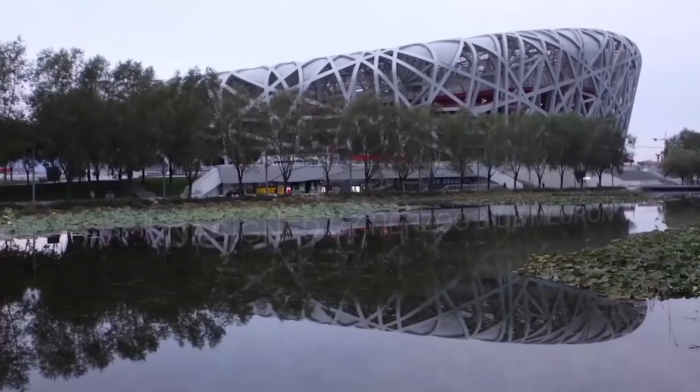The wind is very important for a building. First, let's look at how the wind is formed.

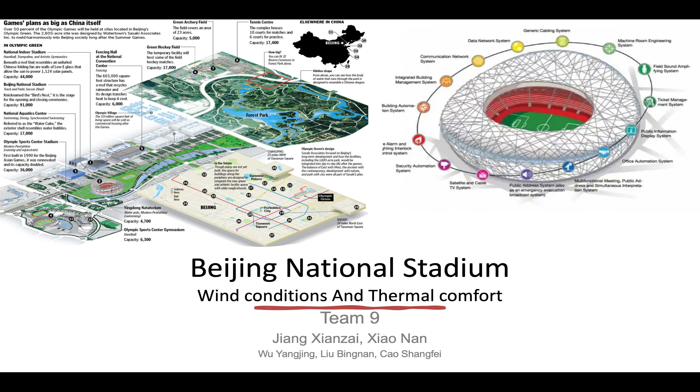Wind that travels around angular surfaces or steep slopes becomes gustier and more turbulent. The wind can also stay turbulent long after passing a significant obstacle. This can be called the turbulent zone or wind shadow.

For some obstacles, the wind can become turbulent well before reaching it. One generic estimate is that the turbulent zone is 7 times the height of the obstacle on the downwind side and 3 times the height of the obstacle on the upwind side.

Therefore, taller obstacles create larger turbulent zones. The reality is far more complicated and depends on a number of factors.

The shape of the object is very important. Gentle slopes with a smooth surface can create negligible turbulence. An angular shape or steep slope, however, creates a far larger turbulent zone.

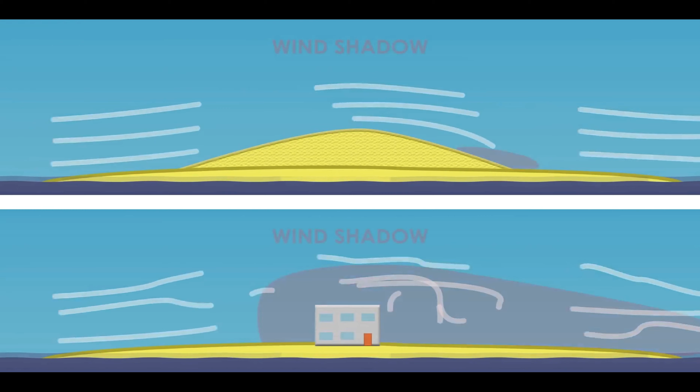The total number of wind obstacles is also critical. The turbulence from a lone object can disappear quickly, since it has clean wind on all sides, which helps to remove turbulence.

However, with numerous obstacles, the turbulence will last far longer, as the wind deflections can combine together.

Another key factor is the wind speed itself. When wind speeds are higher, the gusts are stronger and carry further.

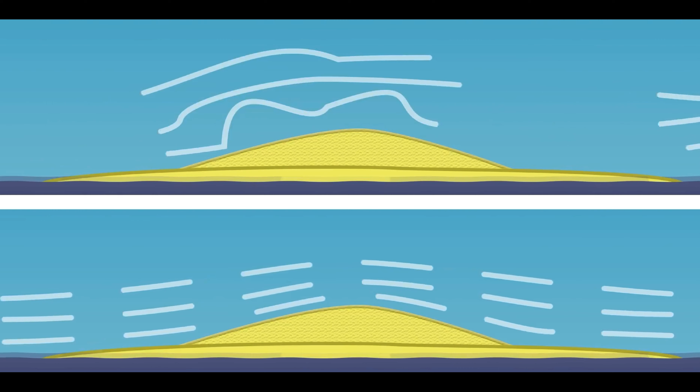Ultimately, your best bet is wind that approaches over open ocean. The wind's approach is then clear of obstacles.

To be sure, you should walk to the launch area and feel the wind. You should be able to feel if the wind is changing.

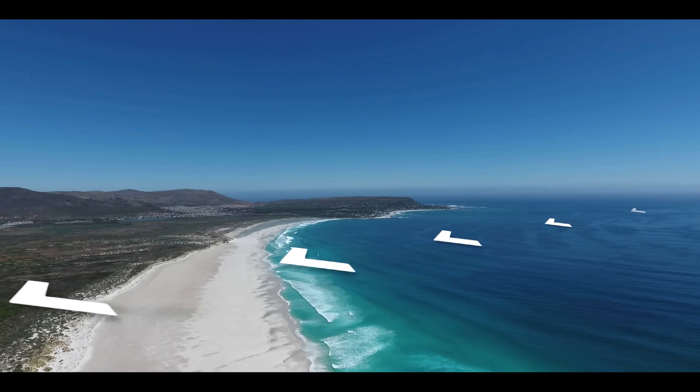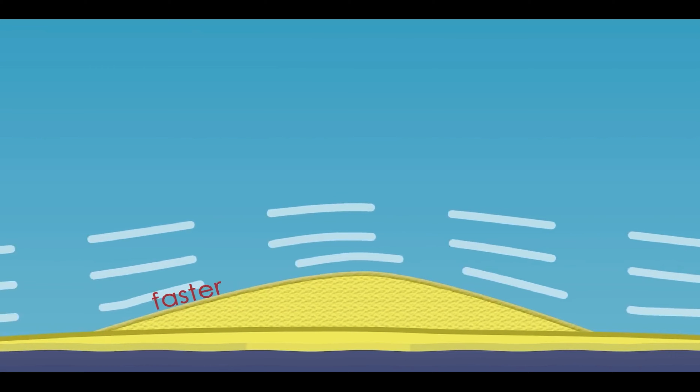Obstacles can also alter local wind speeds. When wind is forced into a narrower space, the airflow is forced to speed up, and wind moving into a wider space will slow down.

Wind passing between two mountains, for example, will speed up. Or wind climbing a slope will be forced to speed up.

This is why it might sometimes seem windy enough when you arrive at the top of a beach or sand dune, but when you walk to the water's edge, the wind's not so strong.

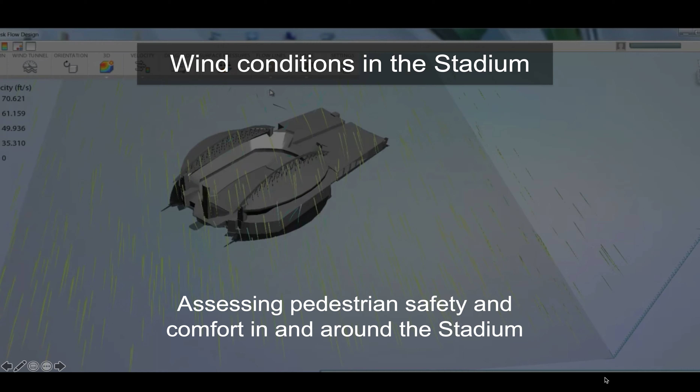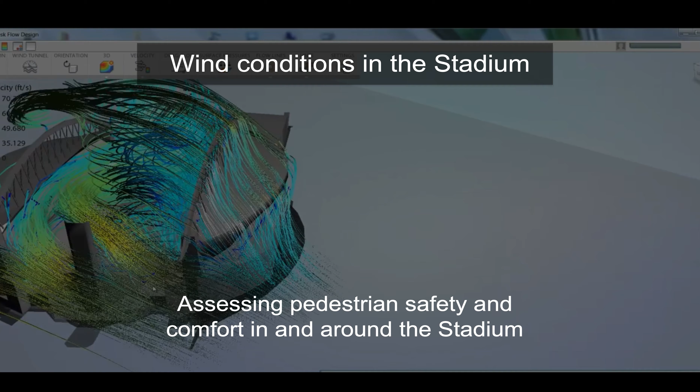So it's necessary to combine boundary layer wind tunnel and numerical modeling studies to assess spectators' comfort levels for the stadium, with wind tunnel measurements being made for the external plaza surrounding it, and for the concourses and the key seating areas within.

These wind speeds were used in assessing pedestrian safety and comfort in and around the stadium. Wind conditions in the stadium and the external plaza are generally suitable for strolling or for short periods of standing or sitting. No areas would be uncomfortable for strolling.

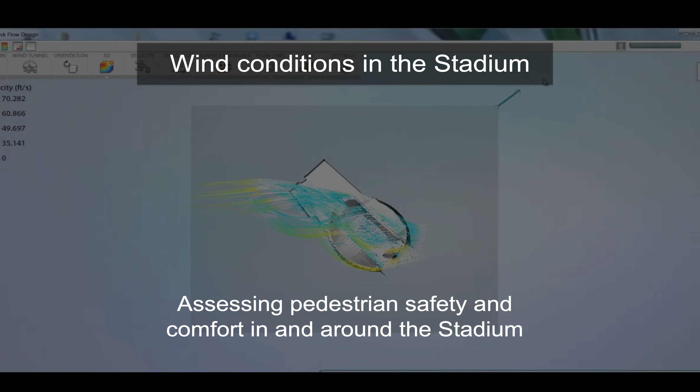The wind speed at the game is also very important. IAAF provides for all track and field records of 200 meters and below: if the average wind speed of the athlete is over 2 meters per second in the direction of travel, the record will not be accepted.

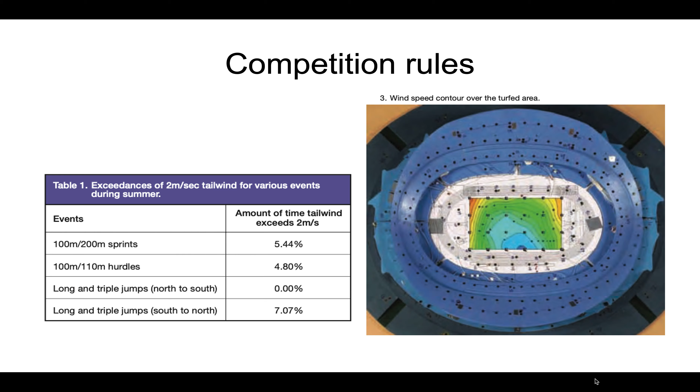Next, let's take a look at thermal comfort. Designing for thermal comfort, there is no one-size-fits-all recipe. Solutions vary depending on the local climate, as well as the type of activity performed by the building users.

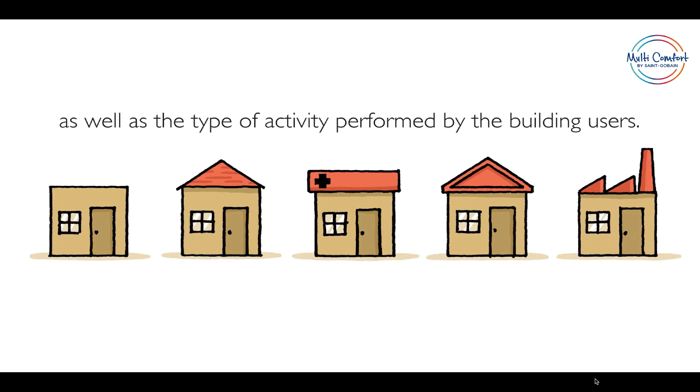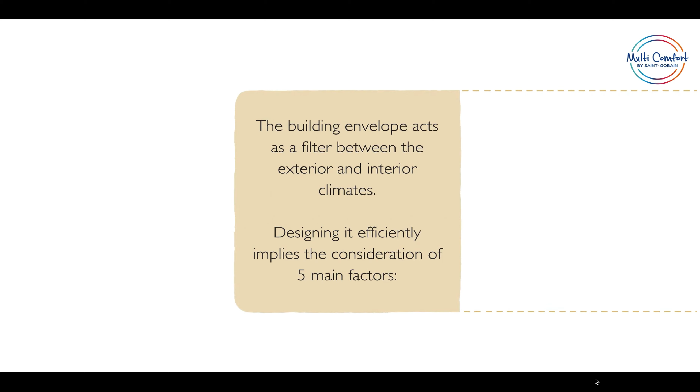The building envelope acts as a filter between the exterior and interior climates. Designing it efficiently implies the consideration of 5 main factors.

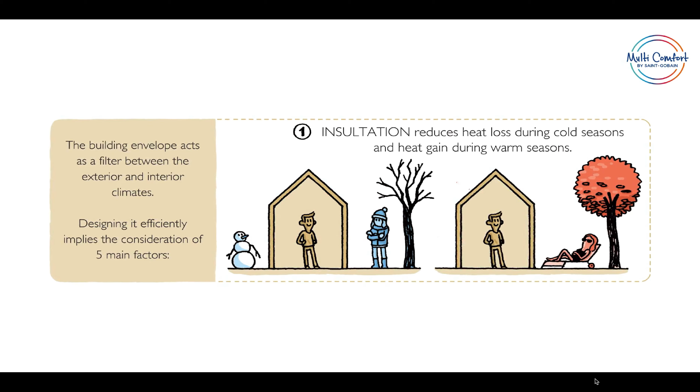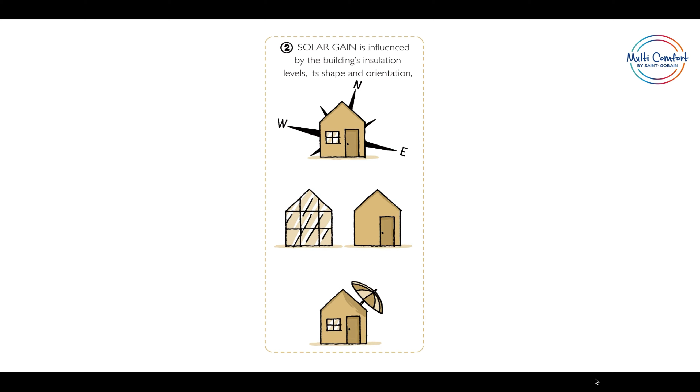First, insulation reduces heat loss during cold seasons and heat gain during warm seasons. Second, solar gain is influenced by the building's insulation levels, its shape and orientation, the window to opaque wall surface ratio, the type of glazing, and shading devices.

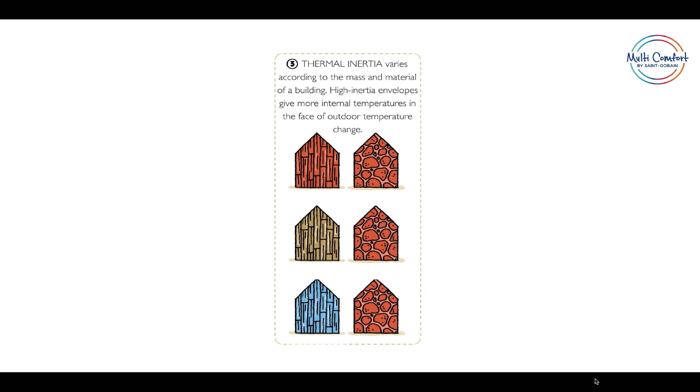Third, thermal inertia varies according to the mass and material of a building. High inertia envelopes give more stable internal temperatures in the face of outdoor temperature change.

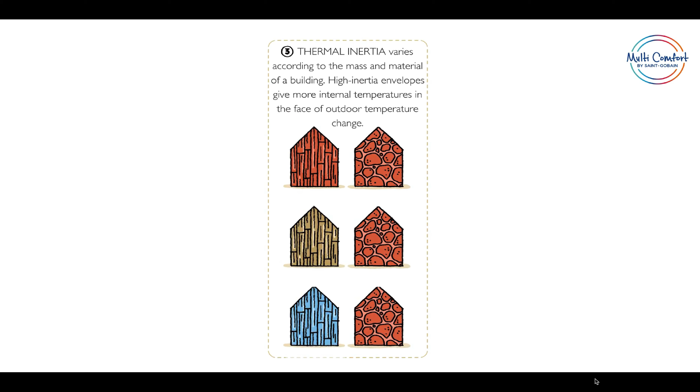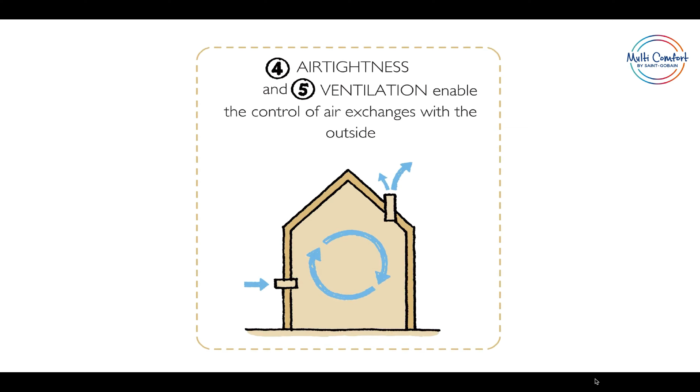Fourth, airtightness and ventilation enable the control of air exchanges with the outside. A well-designed building envelope can dramatically reduce the need for mechanical systems required to provide thermal comfort, so reducing the environmental impact.

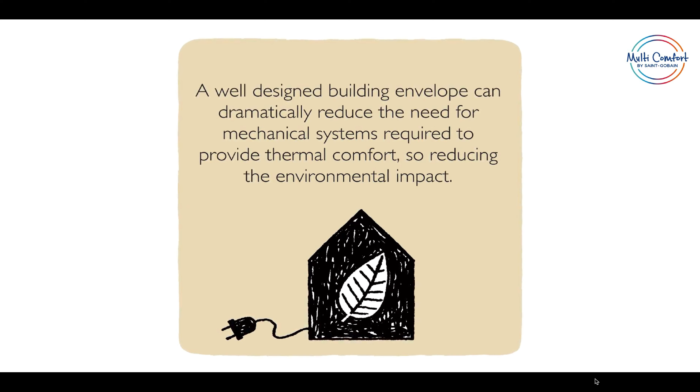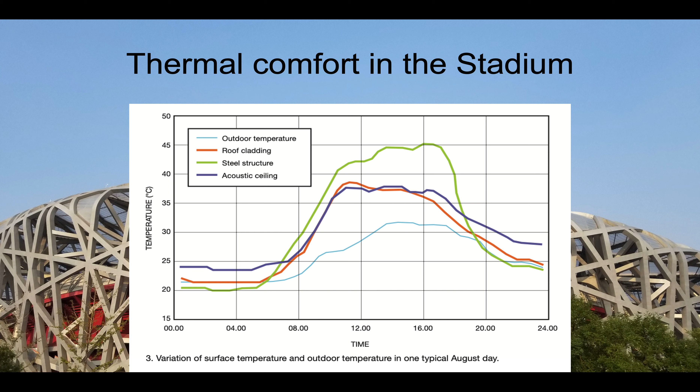As shown in the figure, the surface temperature of the roof and steel members on a typical day during the Olympic Games: the maximum temperature of the acoustic ceiling and the roof cladding could increase to 38 degrees during the daytime, with the roof steel members as hot as 45 degrees due to the strong solar radiation effect and the heat absorption properties of steel.

With the temperature and relative humidity distribution and air velocity vectors evaluated by CFD, the thermal comfort conditions at the spectator area of the stadium were assessed.

During the design process, the following optimizations were performed to improve the thermal comfort level cost effectively, without any active mechanical system.

For example, increase the distance between the highest seat and the false ceiling from 2 meters to 8 meters, and reduce the area of the outer transparent ETFE membrane layer.

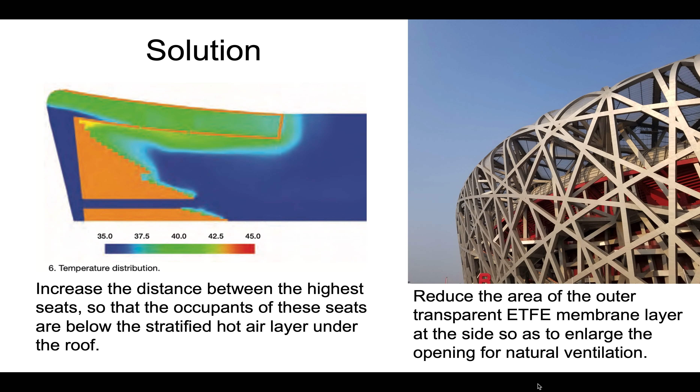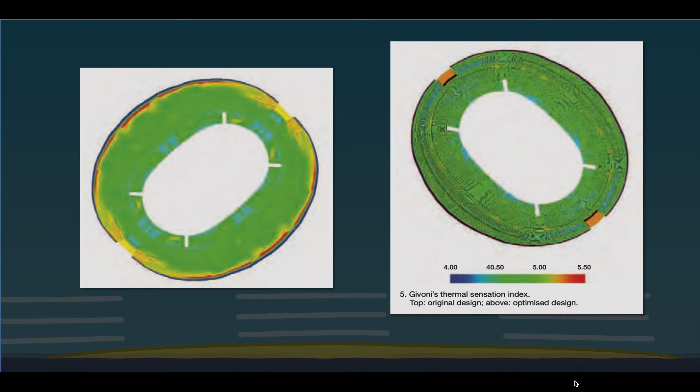As the figure shows, the optimization proved effective in terms of the thermal sensation index.

The Beijing Olympics were promoted as green. A green building design does not only aim for energy efficient or energy conservation solutions, but also for a high level of comfort within the building.

To make Beijing National Stadium's green design work, the thermal conditions inside were critical, especially in its Olympic mode with up to 91,000 spectators.